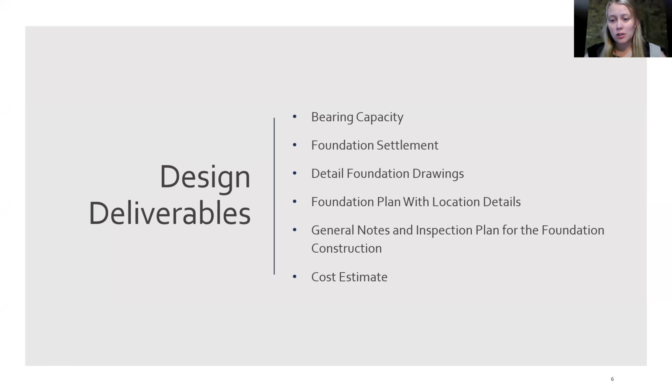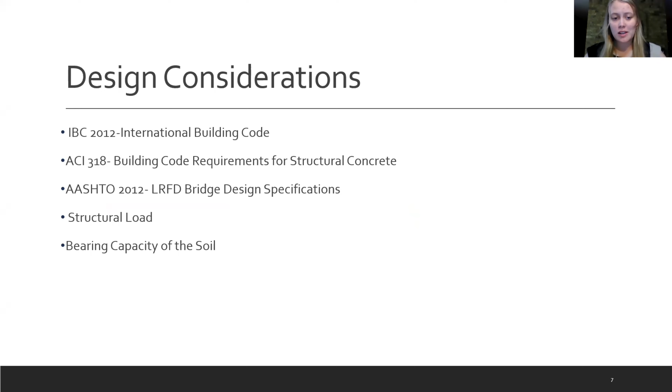The goal of the geotechnical component is to design the foundation for the office suite. Some of the design deliverables are as shown: the bearing capacity, the settlement, all of the drawings and details, as well as the general notes, inspection plan, and cost estimate. Here are some of the design considerations, such as the International Building Code, the building code requirements for structural concrete, the bridge design specifications, the structural loads, and the bearing capacity of the soil. All of the structural information used to determine the type of foundation, as well as the dimensions of the foundations, was provided by K16 Consulting.

The preliminary design considerations for the foundations were a pile foundation and a shallow foundation. Both were acceptable, but the shallow foundation is more economical, more cost-effective, and needed less material, so it was determined that a shallow foundation was the best option. For a more sustainable design, a shallow foundation with recycled aggregate was also considered, but due to time constraints and the lack of research on recycled concrete, it was decided it was best to use a more traditional concrete for the shallow foundation.

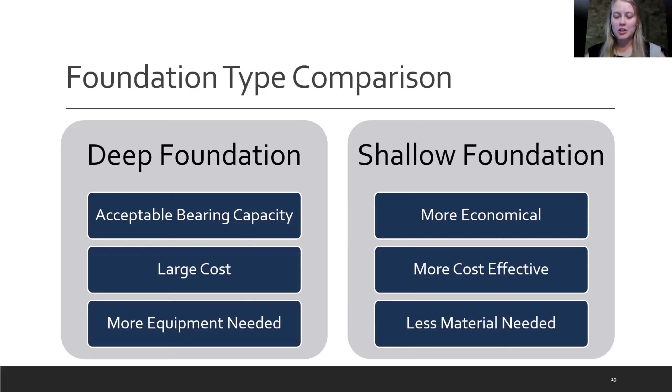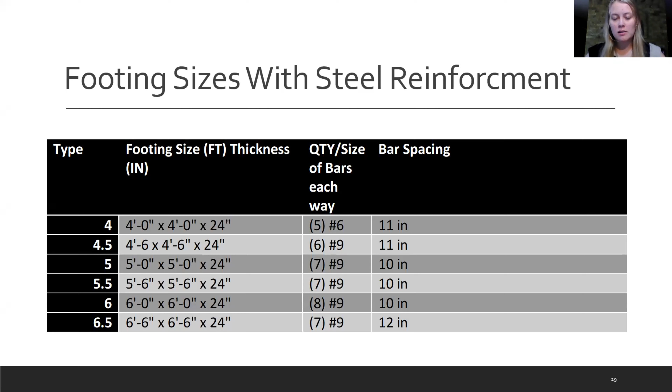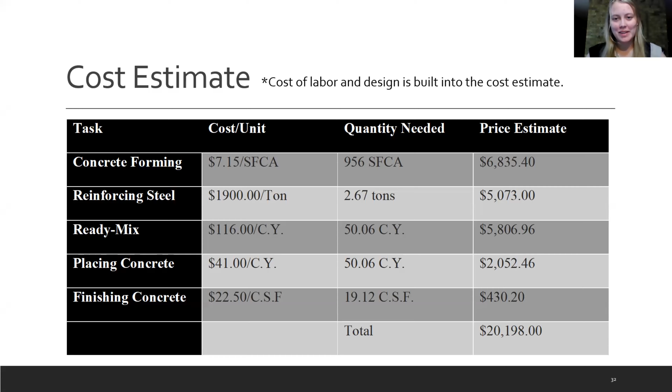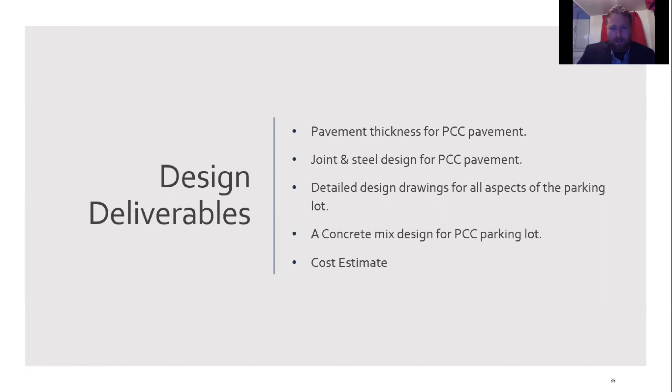Thanks, Hannah. My name is Jonathan Mink, and I'm a civil engineering major at Tarleton State University, and I'll be going over the transportation component of the project. The design objective is to have a parking lot for the new engineering building at Tarleton State University. The design deliverables will be a pavement thickness for the new parking lot, along with a joint and steel design. Detailed drawings will be shown later on the slides, along with the custom concrete mix for the parking lot and a cost estimate.

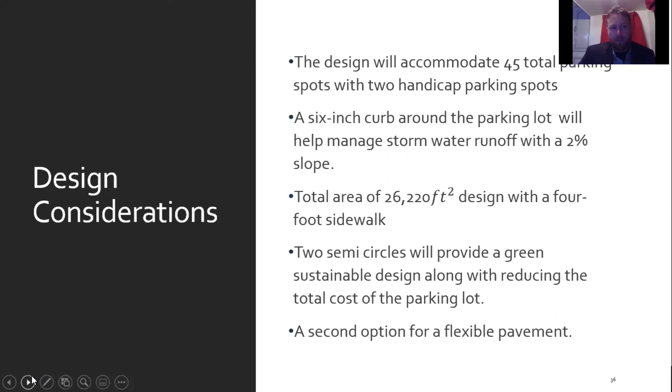The design considerations will accommodate about 45 total parking spots, with 2 handicap parking spots located near the front of the building. A 6-inch curb will go around the parking lot to help manage stormwater runoff, with a 2% slope for the parking lot. The entire area of the parking lot will be a little over 26,000 square feet, with a 4-foot sidewalk running the length of the engineering building. There'll be 2 semicircles that will provide a green sustainable design that will help reduce total cost because it will require less concrete and steel. And a second option for flexible pavement will also be discussed in the next slide.

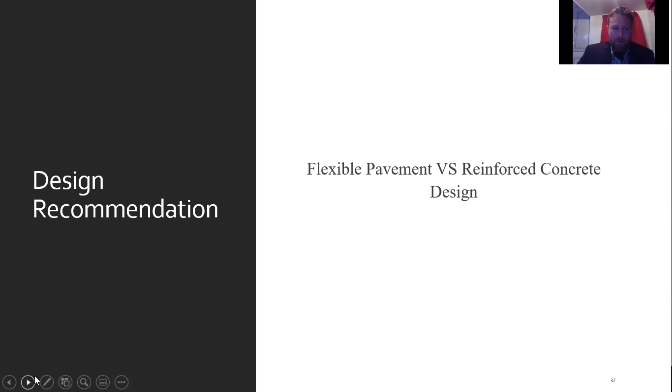So flexible pavement versus reinforced concrete design. Because of the high traffic of Tarleton, reinforced concrete is the preferred method, because flexible pavement has too much wear and tear over the years, so it will require more flex sealing, more striping, and more maintenance with potholes and other cracking issues. So a reinforced concrete design for 20 years will be recommended for the new engineering building. The design of the subgrade: the modulus of subgrade reaction is found using the California bearing ratio.

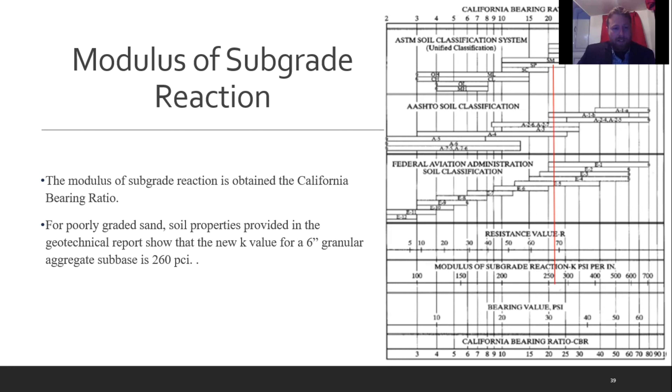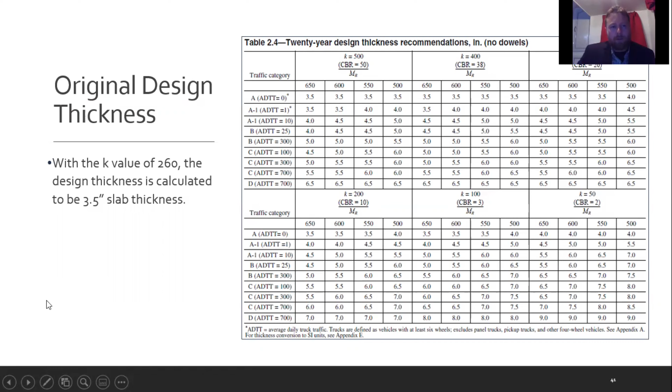From the boring logs, a poorly graded sand and soil properties is found that the K value is for a 6-inch granular aggregate subbase, and it'll be 260 pounds per cubic inch. For the design for the thickness of the reinforced concrete parking lot, the original design thickness from the K value of 260 is that the design thickness of the reinforced concrete parking lot will be about 3.5 inches. But because we're doing a reinforced concrete design, the minimum thickness will have to be 5 inches.

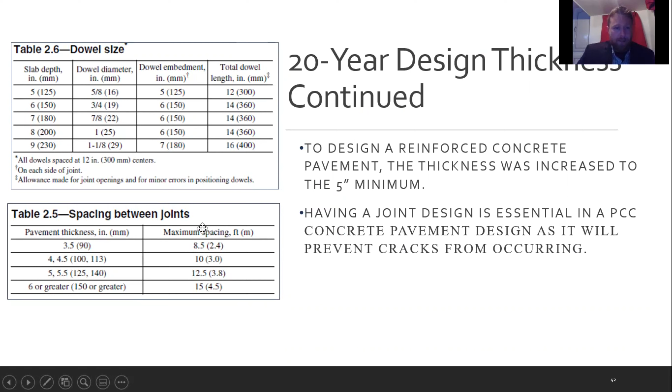Having a joint design is essential for the concrete parking lot because it will prevent cracks from occurring, and it will help us use dowels in the design. For the area of steel, the area of steel calculation is shown below. The total area of steel that is going to be needed in the design of the parking lot will be 0.014 square inches.

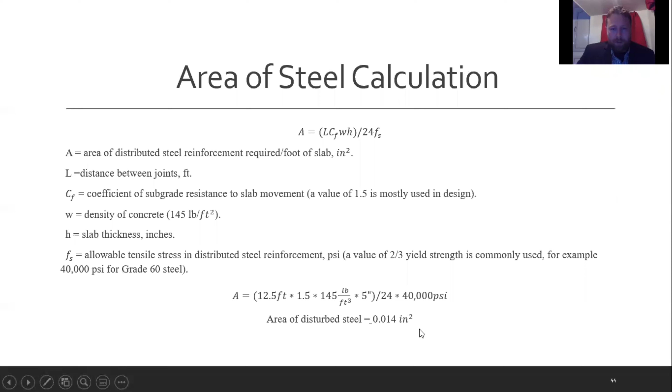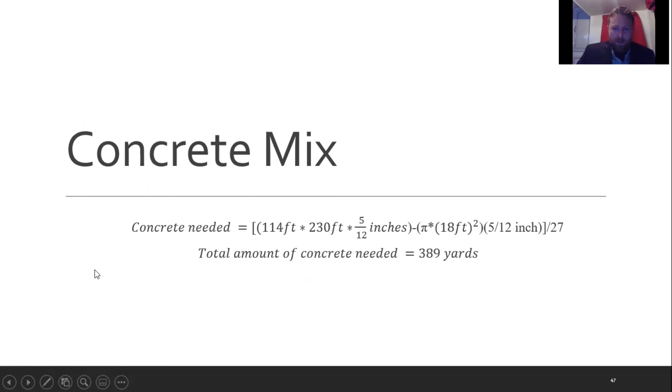For the concrete mix design, the first thing we need to do in the concrete mix design is to calculate the total amount of concrete needed. We'll need just under 390 yards of concrete for the entire parking lot. The recommended air content is going to be used from the manufacturer specifications of 0.15 fluid ounces per 1% air per 100 pounds of cement.

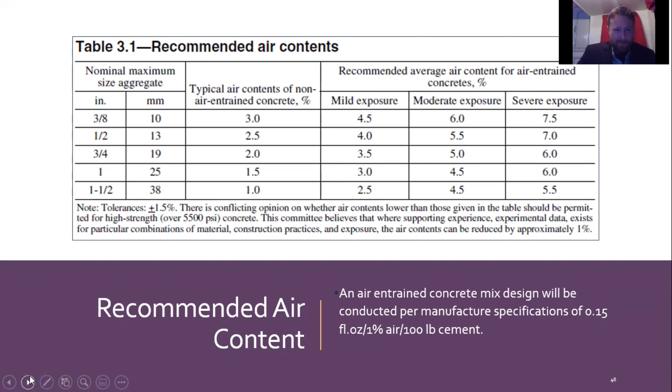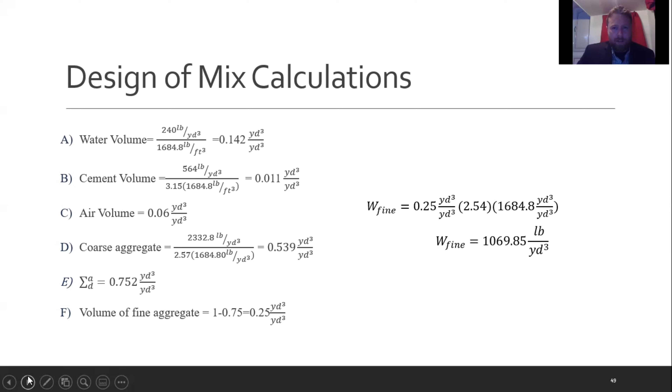The design of the mix calculations are shown here below. It shows the water volume, cement volume, air, coarse aggregates, along with the fine aggregate. And the next slide, we'll talk about how we use the modified water design. The water correction is shown here in the calculation from 240 to 115.13 pounds. And the aggregate dry mass water percentage is also shown here that we will need a total of 124.87 pounds of water per yard of concrete.

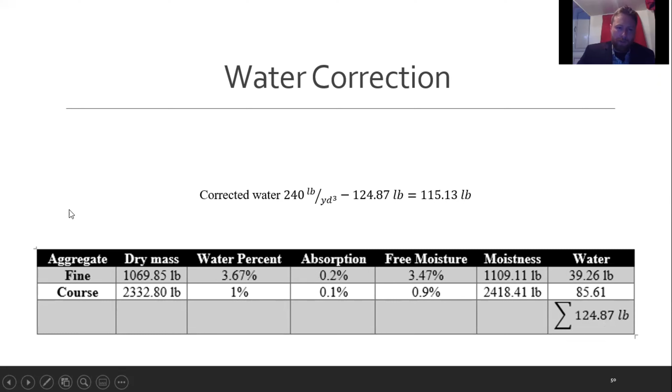The summed up design of the PCC concrete design is that it will be a 20-year thickness with 12.5-foot spacing between joints. The area of distributed steel will be 0.014 square inches with a tie bar size of 1/2 inch by 24 inch. The total area is just a little over 26,000 square feet with a 5-inch slab, needing 389 yards of concrete to finish. We'll be using a manufacturer specification of 0.15 fluid ounces per 1% air per 100 pounds of cement and no larger than coarse aggregate of 1.5-inch nominal size.

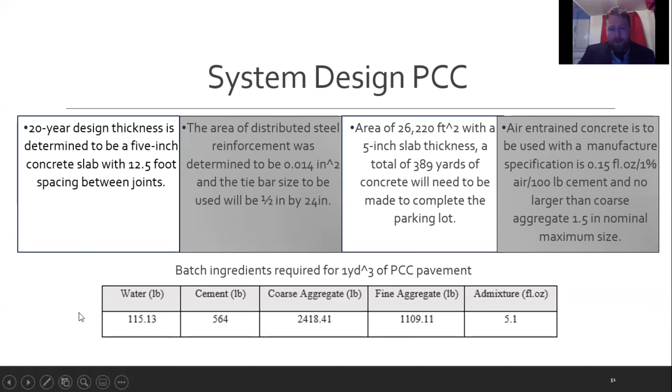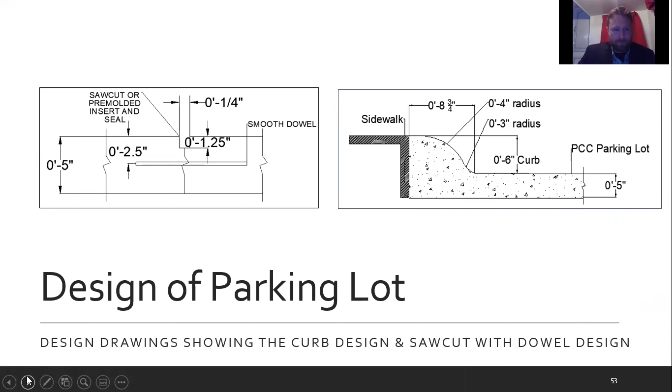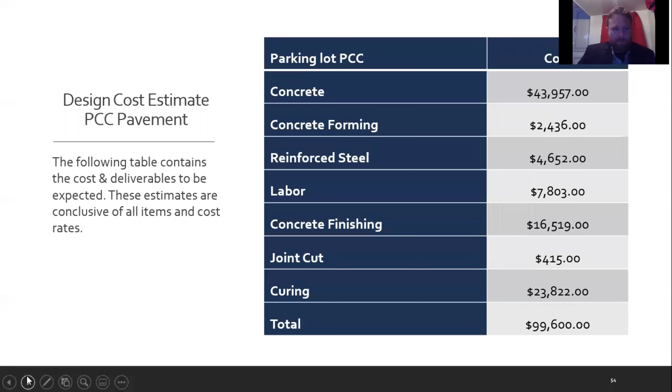The design cost estimate came in right under $100,000. It includes the labor and the material price for the parking lot. And I'll be handing it off to Blake Donahue to talk about the water resources component of the project.

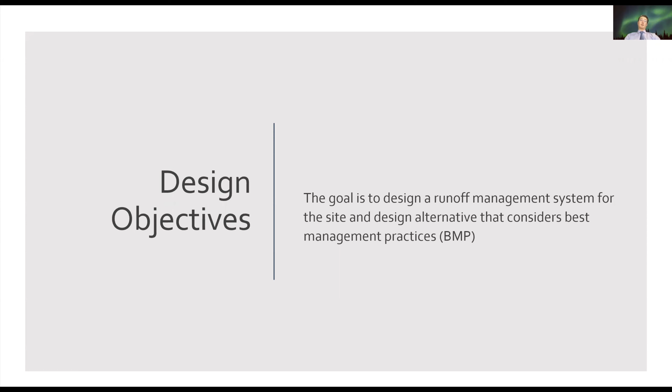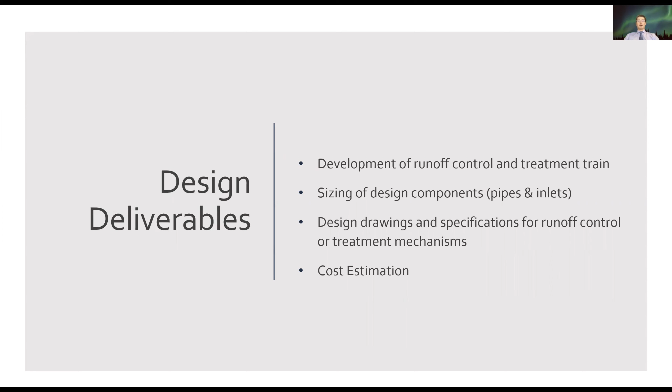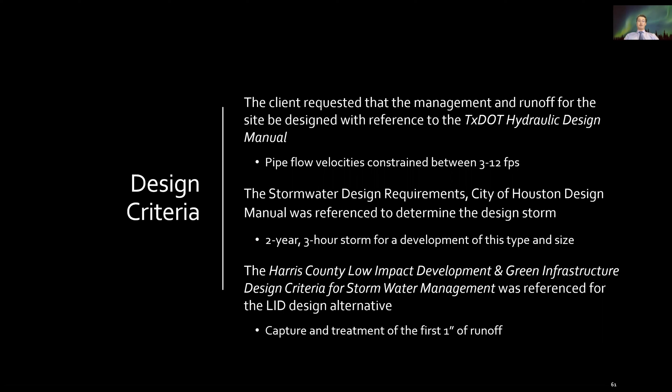Criteria used in these designs were specified in TxDOT's hydraulic design manual and the City of Houston's stormwater management requirements. A design alternative using best management practices followed the Harris County Low Impact Development and Green Infrastructure Design criteria for stormwater management. This proposed development features an office suite, parking lot, and sidewalks. These will introduce impervious surfaces to nearly 1/3 of the site, thereby increasing the runoff. A storm sewer lies under Lillian Avenue along the downslope perimeter of this site.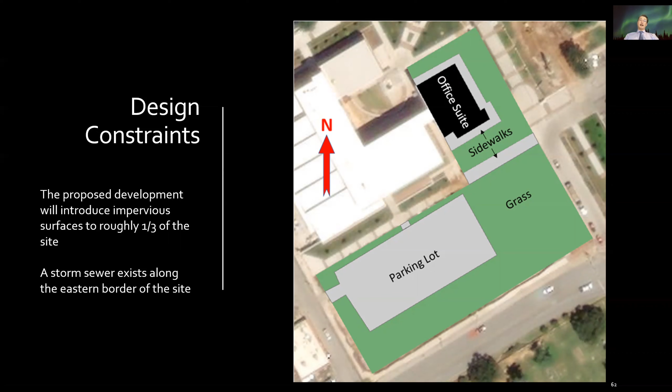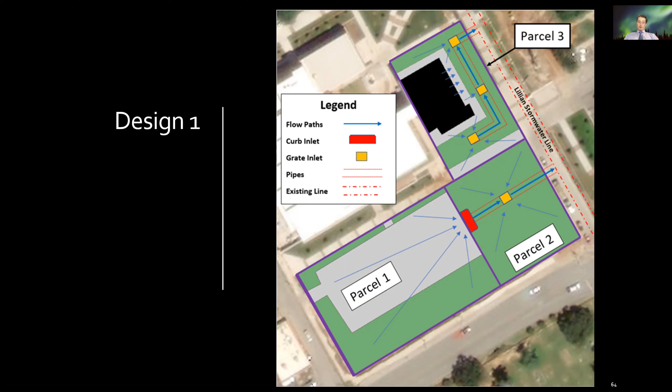The site was partitioned into parcels in order to better quantify the peak flows impacting components within each one. This first design features a curb inlet to capture the runoff from the first parcel, and the remaining parcels will be drained by grate inlets. The system directs flow downstream through conduits into the existing stormwater utility under Lillian Lane.

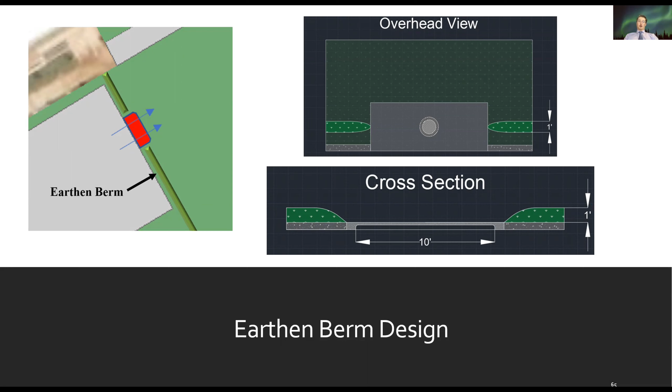An earthen berm partitions the parcels. A slot in this berm conveys carryover discharge for further capture downhill. The second design features a rain garden and planter box, which were selected based upon their ease of implementation and minimization of their costs, including maintenance.

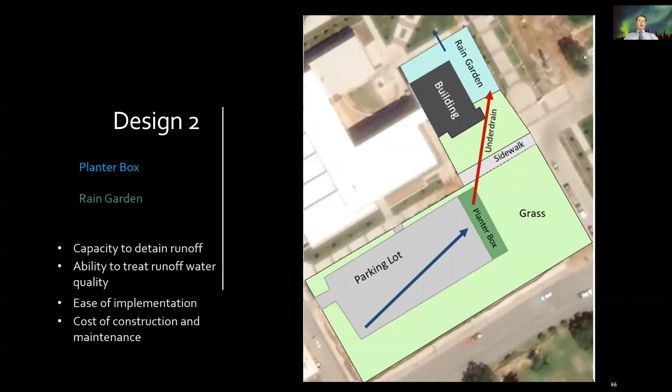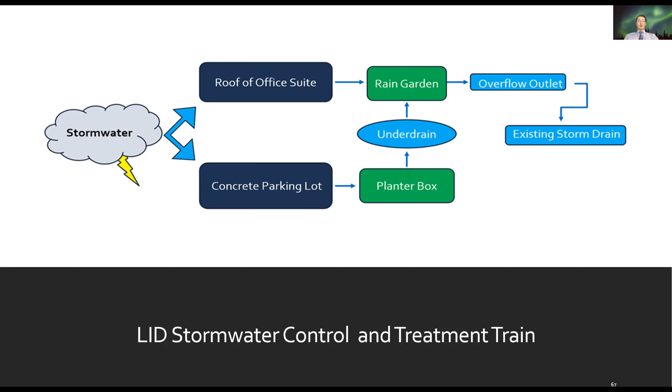The runoff control and treatment train for this alternative directs runoff from impermeable surfaces to components that allow for detention and the treatment of water quality. The recommended design was selected based upon projected costs and timeframes of construction. Since no local regulations require the detention or treatment of runoff water quality, these design criteria were given lesser weight. This resulted in a decision to recommend the traditional stormwater runoff design.

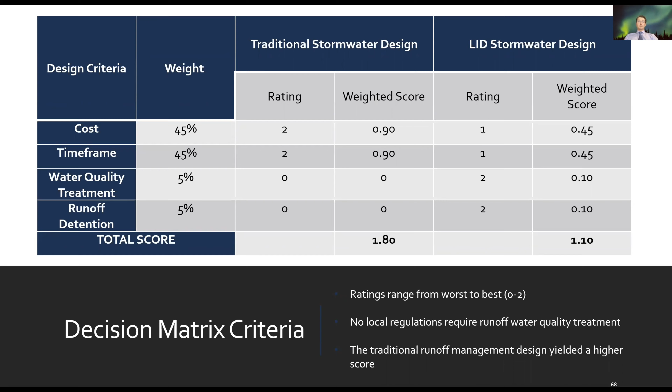This design will utilize the existing storm sewer adjacent to the site and will be constructed with prefabricated components. This design was conducted through peak flow calculations in order to size the inlets following TxDOT's equations. The conduits were sized in order to convey the peak flows, and their slopes were determined through applications of Manning's equations.

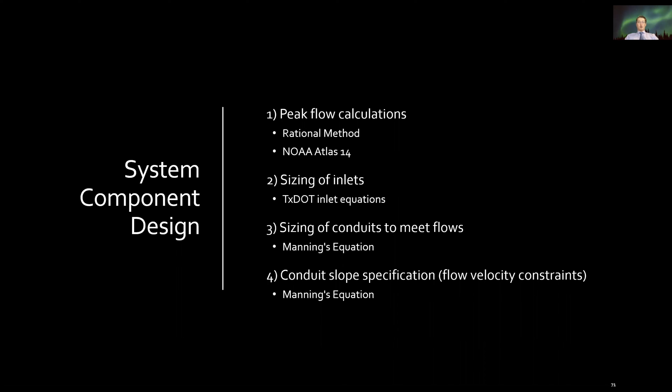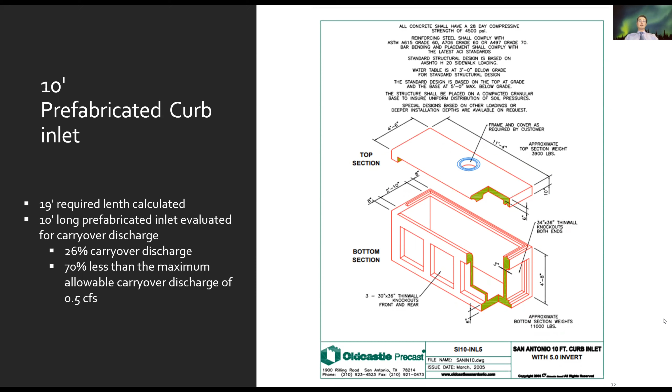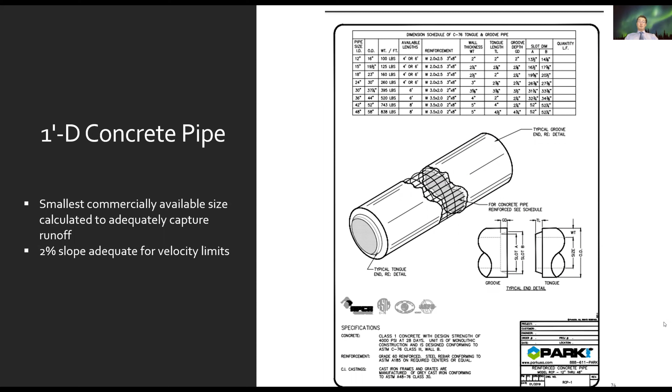A 10-foot curb inlet was selected. The carryover discharge resulting from this inlet size was calculated to be well within the limits defined by TxDOT. The smallest commercially available grate inlet and catch basin was selected. The smallest available concrete pipes were chosen and placed at a 2% grade to match the average slope of the site.

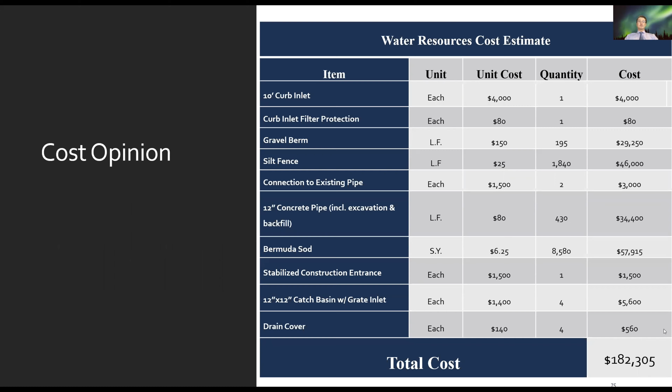Hi, my name is Noah Easom, and I'm the environmental lead to this project. So Tarleton State University has been recommended to reduce the lead concentration levels from 800 milligrams per kilogram to below 400 milligrams per kilogram before any further action regarding construction can begin on the office suite. The design deliverables given will be the design criteria, primary design schematic, preliminary lab results for design, and a cost estimation.

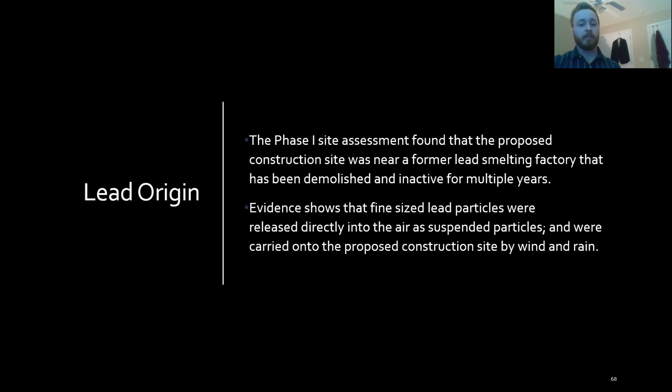So based off our phase 1 site assessment, we found that the proposed construction site was near a former lead smelting factory that had been demolished and inactive for multiple years prior. The evidence showed that these particles were released directly into the air as suspended particles and were carried into the proposed construction site by wind and rain. The phase 2 site assessment was completed in December of 2020 and showed that the average particle sizes of lead were 200 micrometers in size and mostly within the first 6 inches of topsoil.

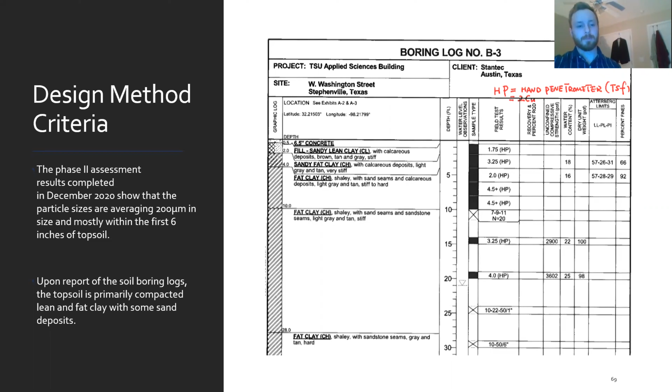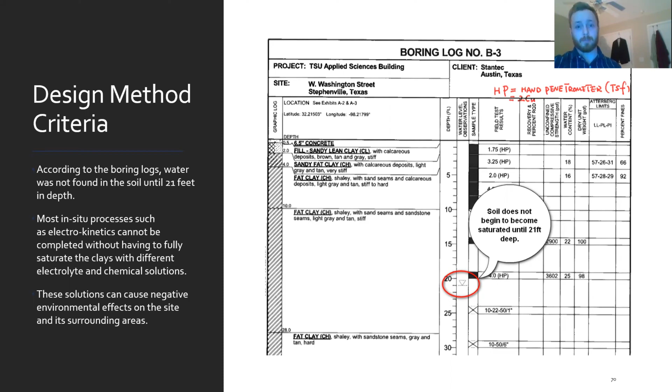According to our boring logs, we saw that the soil does not begin to become saturated until 21 feet in depth, which means most in situ processes are almost impossible without having to saturate the clays and other soils with electrolyte and chemical solutions, which is going to be very detrimental for the environment. Up next will be our selection of design process.

Design number 1 involves an electrochemical process where we would excavate the untreated soil, transport it to our remediation site, where it would go into a pretreatment of 5% KCl and acetic acid. From there, the solution will be transferred to our agitator table, where the lead can be collected, and then the clean soil can be moved over to our electrokinetic reactor with iron and aluminum electrodes. And from there, the contaminated solution can be moved over to our lead collection chamber and be sent to our landfill, while the clean soil can be sent back to the remediation site to be mixed and recompacted for construction.

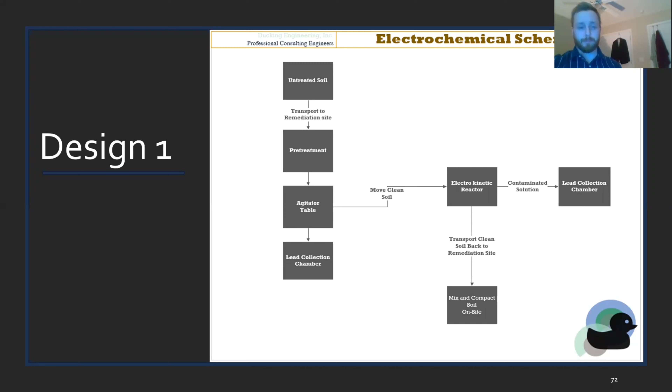Design option 2 is very similar to option 1, except it is just the chemical wash portion. So we would take the untreated soil and transport it to our remedial site where the pretreatment of 5% KCl and acetic acid can be applied, which will run through the agitator table. Then the contaminated solution will be collected in our lead collection chamber where it can be sent to our landfill, and then the clean soil can be transported back to our remediation site in order to be recompacted for further construction.

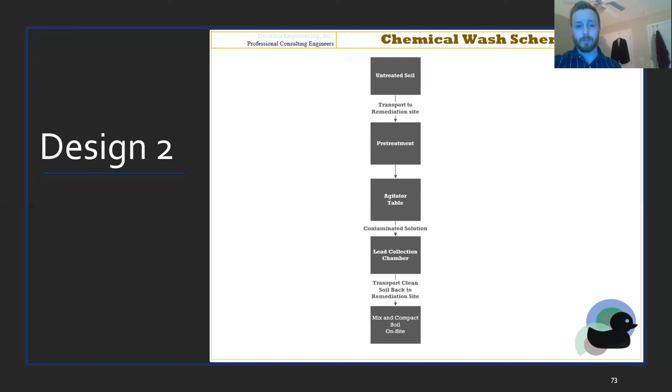Our decision matrix criteria was given based off of a rating of 1 or 2, with 2 being superior. And since our client stated the percent reduction had the highest priority of all of the design criteria, it got a 60% majority weight. And based off of the results of this, the electrochemical remediation got a total score of 1.55 versus 1.30 for the chemical wash remediation. Because of that, we're going to recommend and show the design for an electrochemical remediation.

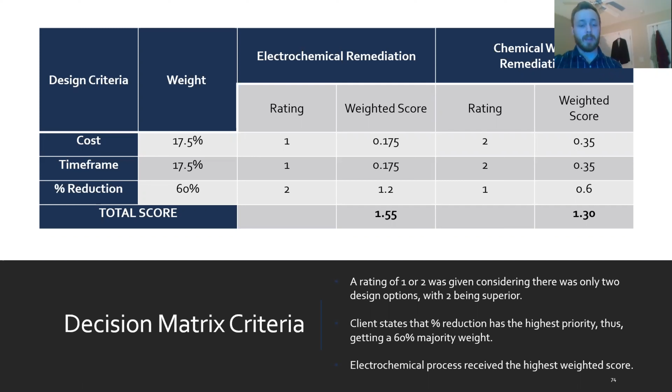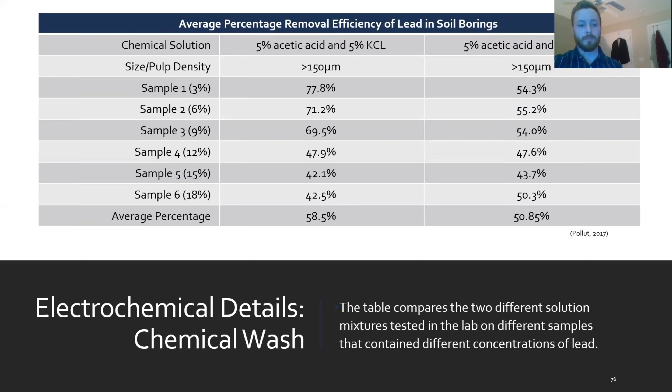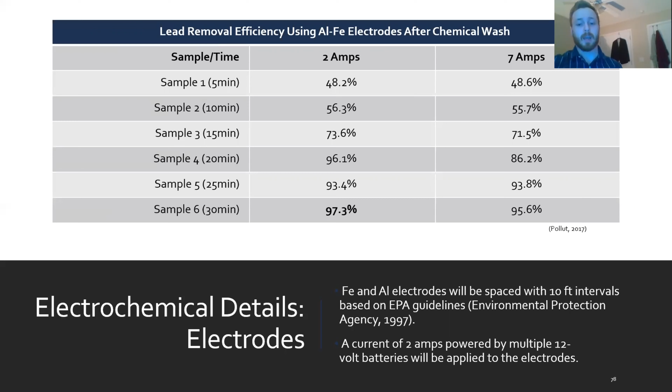Based off of this, Ducking Engineering recommends that Tarleton State proceed with the electrochemical remediation design, as it will have the highest chance of success with the reduction of lead levels below 400 milligrams per kilogram, with a 97.3% reduction, compared to only 58.5% with just the soil wash. Now, it should be noted that these are laboratory results, and they should expect to yield a certain percentage of error when applied to much larger quantities of soil, which could possibly put option 2 at risk of not doing the 50% reduction recommended by the EPA.

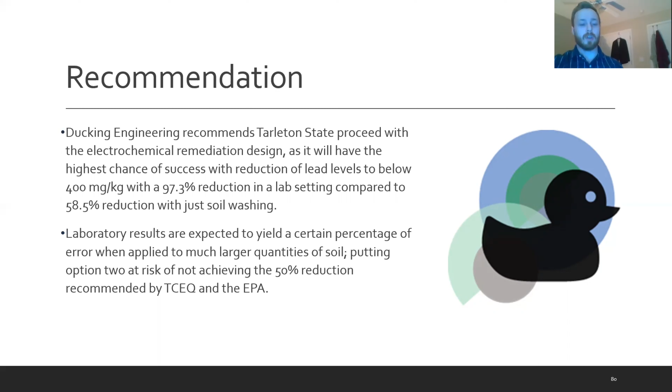Up next is the electrochemical process cost estimate. So based off of this, the electrokinetic process and soil washing process will be performed by Ducking Engineering themselves, which allows us to lump in the cost of labor and design cost into this total estimate, which is seen to be $3.3 million in costs. More details can be found in the Appendix A3.

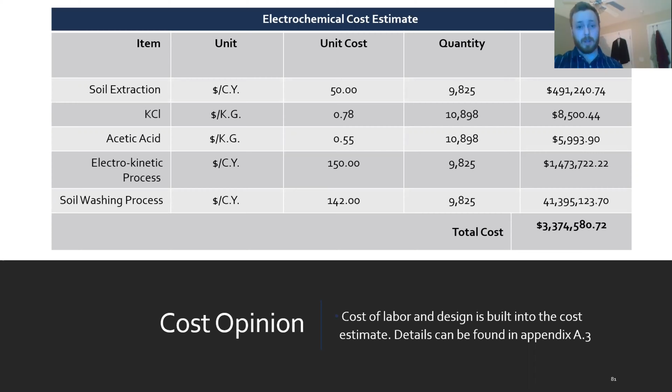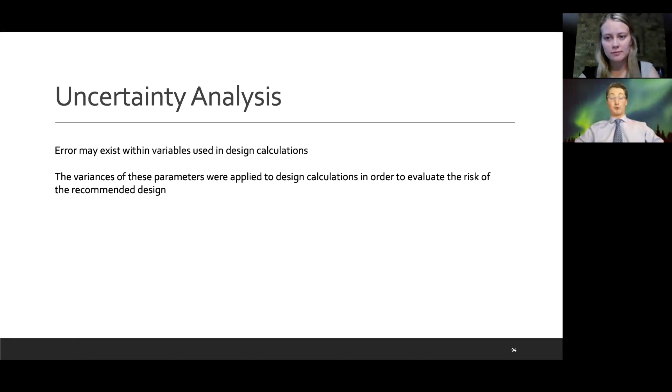An uncertainty analysis was performed for the geotechnical and water resources components of this project. Error may be present in variables used in design calculations. Because of this, these variances of the parameters were applied to design calculations to evaluate the recommended designs. The value for the intensity of rainfall for this design storm was sourced from NOAA Atlas 14. This value is estimated from a partial duration series, which may introduce error due to variability in the sites that collect the data. Because climate change may alter precipitation trends, this estimated value may vary over the course of the design's life cycle.

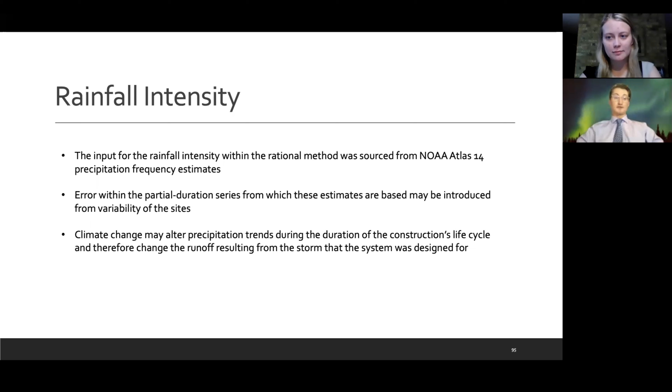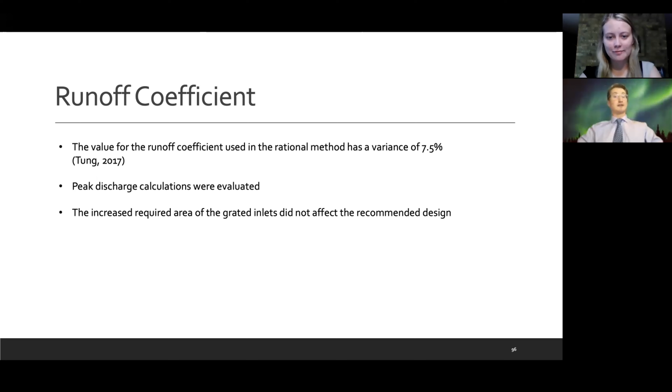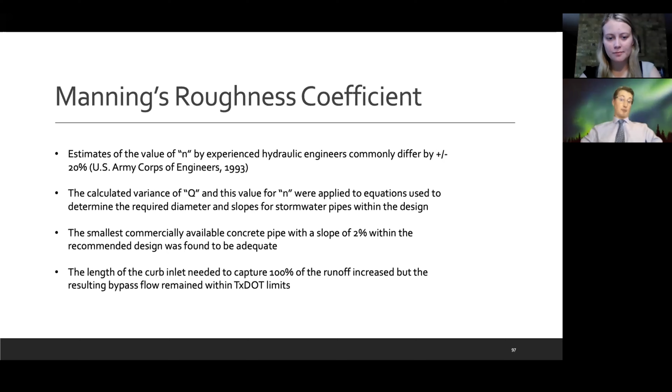The value for the runoff coefficients within the rational method may have variances of 7.5%. Peak discharge calculations were evaluated, and they did not result in a change to the design's recommendations. The roughness coefficients selected within the modified Manning's equations may vary by 20%. When this variance, along with the variances of the calculated peak discharge, were applied to design calculations, they did not affect the recommended components. The excess bypass flow from the curb inlet did remain within the limits.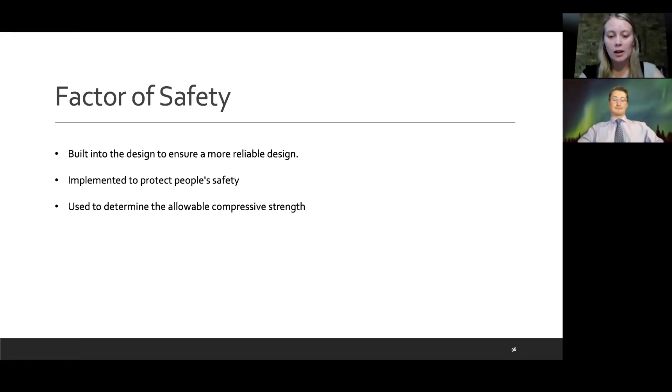To account for any uncertainties in the foundation design, a factor of safety was implemented. The factor of safety is included in the design to ensure the safety of the public. The factor of safety used in this foundation design is 3. This value is advised by a mentor, so I decided it was the best value to use to ensure an adequate design. The factor of safety was applied to the ultimate compressive strength and used to determine the allowable compressive strength. This directly affected the size of the footings required, making them larger and therefore safer.

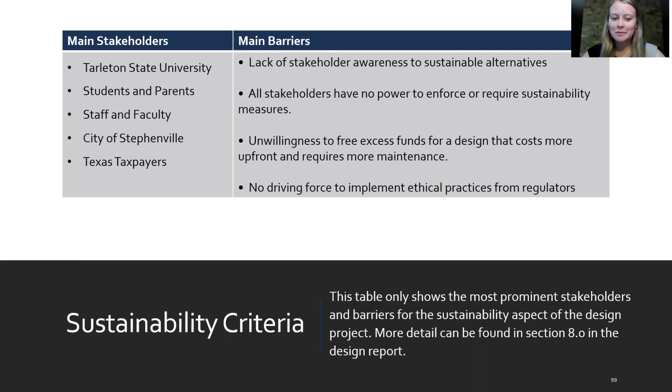Next, we have the sustainability criteria. This table only shows a small portion of the barriers preventing us from implementing a more sustainable design. A full list of barriers can be found in the sustainability section of the design report.